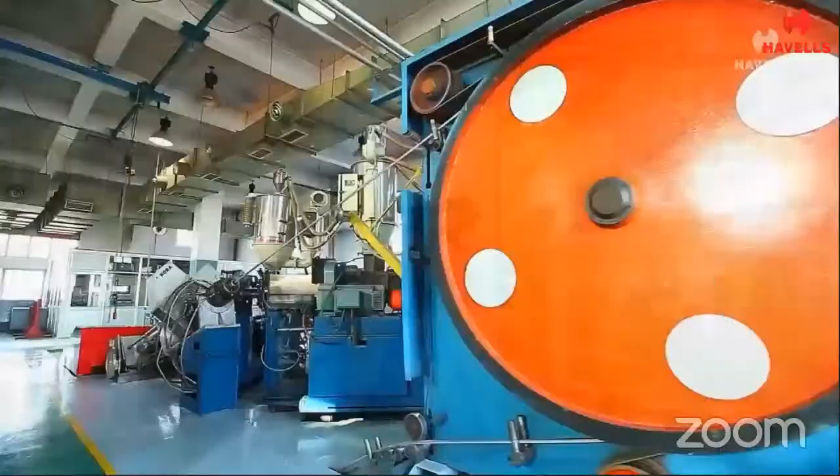For more than 6 decades, Havells India Limited has been focusing on building a better future, a future where technology is used to drive progress, improve business outcomes, and create a better quality of life. Today, Havells stands tall in the FMEG sector as a major power distribution equipment manufacturer with a strong global footprint, owing to its innovative future-ready products for a wide spectrum of applications. With the acquisition of Lloyd in 2017, Havells made a foray into the high-potential consumer durable segment with offerings of air conditioners, LED televisions, washing machines, refrigerators, and dishwashers. This new synergy further complements the brand's deeper into homes vision. Havells owns some of the most prestigious global brands like Crabtree, Lloyd, Standard, and Reo. Its global network constitutes over 5,000 professionals across its offices. As part of its Make in India philosophy, Havells manufactures 97% of its products in-house.

With 14 state-of-the-art, fully automated manufacturing plants located across India, Havells offers superior quality and globally benchmarked products to its customers. Havells has set up a large distribution network to set new benchmarks in prompt delivery and service. Over 11,000 dealers, 150,000 retailers, and 700 plus Havells Galaxy exclusive brand showrooms across the country help customers choose from its wide range of products.

Havells has a robust supply chain management system with 31 warehouses located pan-India. The meticulous forecasting and demand planning delivers a seamless tracking system.

Havells is the first FMEG company to offer doorstep service, offering a seamless post-purchase experience. It has the largest service network with 800 plus service points covering 441 towns, 24/7, across India.

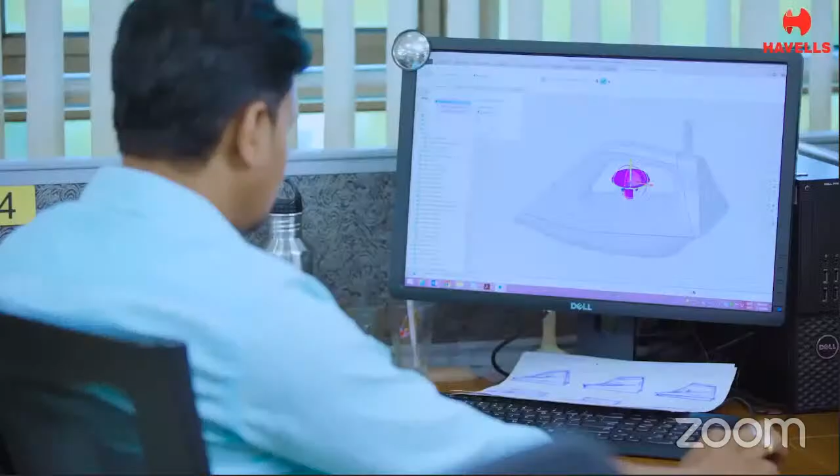Havells Center for Research and Innovation, CRI, at Noida, with a team of highly qualified engineers and designers, continuously works towards creating differentiated and innovative products while adhering to stringent quality norms at par with international standards. Havells products are certified by nationally accredited laboratories such as CPRI and ERDA.

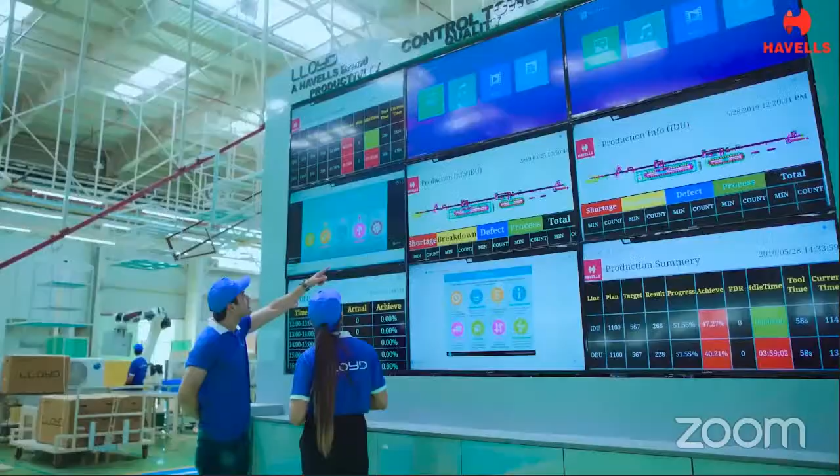Havells has a strong in-house IT vertical which develops innovative technology platforms to support its robust service and supply chain management system. Growing together is ingrained in the ethos of Havells, resulting in many innovative and profitable schemes for its dealer community.

Havells has strong credentials in B2B and large government projects as well, such as lighting up Kolkata railway station and partnering with NBCC India Limited to beautify and transform the night view of India's heritage monuments like Humayun's Tomb, as it believes in the philosophy of spearheading the progress of the nation without ignoring the past.

Havells has taken giant strides to create an innovative world full of possibilities, not only for itself, but also for all its channel partners and customers. With a commitment to improve people's lives and help create a better global society, Havells is inspiring the world and making a difference.

Okay, so let me talk a bit more about ADEX and the overarching program, which is called Havells Insignia. We are bringing industry experts onto this unique platform that we are creating, called Havells Insignia. The objective is to engage and collaborate with each other.

It is going to be an interactive platform where architects, designers, and consultants of repute from India and abroad will come together to share their thoughts, vision, expertise, and shared knowledge. Most of it will be through a select invitation for a select club. It's going to be a unique initiative dedicated to facilitating the development of an ecosystem for world-class designers.

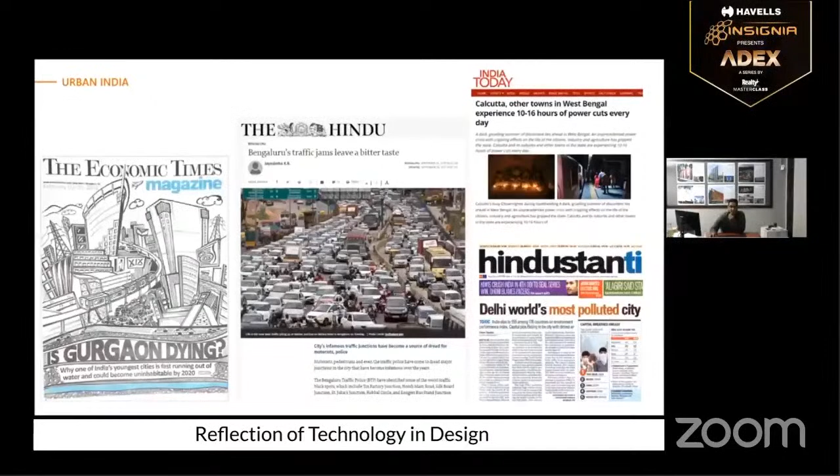India has one of the largest populations in the world, next to China—about 1.4 billion people. But urban India has all the sort of issues that large emerging nations have. It has water issues in our cities. Climate change has affected India tremendously; we've had some of the worst weather patterns in the last year or so. We've had issues with energy, and issues with pollution. Some of this led to a lot of our early thinking on why we would pursue the whole genre of sustainable design, and see if architecture, if buildings, the whole built environment, can help resolve what our politicians and our cities over the years have not been able to do.

So very early on, we looked at what's really the issue with energy. We did this study about a couple of decades back; at that time India's population was 1.2 billion, now it's about 1.4 billion. Broadly speaking, India has a daily solar radiation on average of 5.5 kilowatt hours per square meter of the country's land mass. We only really need 0.003% of this land mass if we were to drive our entire energy needs by solar. It's actually nothing—only 2% of the wasteland, the deserts of India, is all that we would need to drive all the energy, not for today's requirement, but for what is projected for 2050.

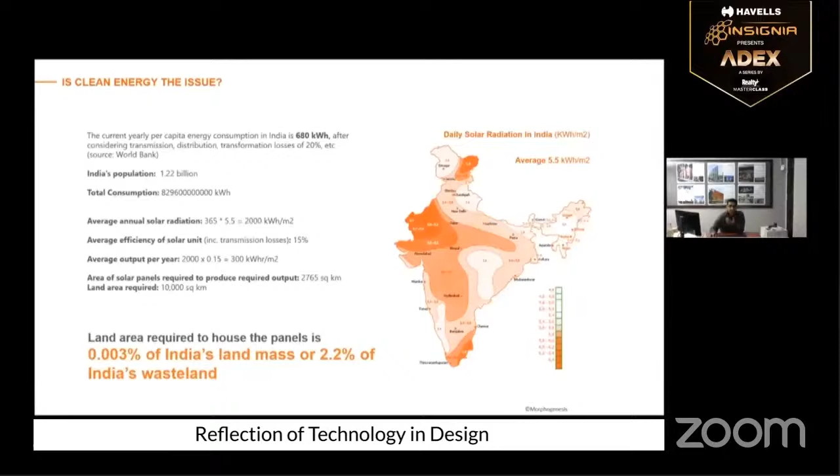Then the second part was water. If we just look at the annual rainfall—I know this is very macro level data, but it laid the context for what we would do at a micro level—energy wasn't a problem, but it is. Water isn't a problem either: 2% of the rainfall in India, if harvested, would suffice 150 liters a person for 1.4 billion people. So what are we really doing? We were looking at our cities and our buildings, and we had developed this sort of system where our buildings would consume energy, consume water, and generate waste—it was a one-way flow.

Uniqueness is about a set of metrics which looks at tradition, heritage, and culture. That third philosophy grows from the fact that across India, given that price points of construction are extremely frugal, everything started looking the same. It didn't matter whether you were in a cold climate, a temperate climate, a hot climate, or a warm humid climate, most buildings started looking the same, because they were adopting processes of construction and design that allowed for that to happen. We found ways of digging into the past to find ways to build the future. That's where we got the unique.

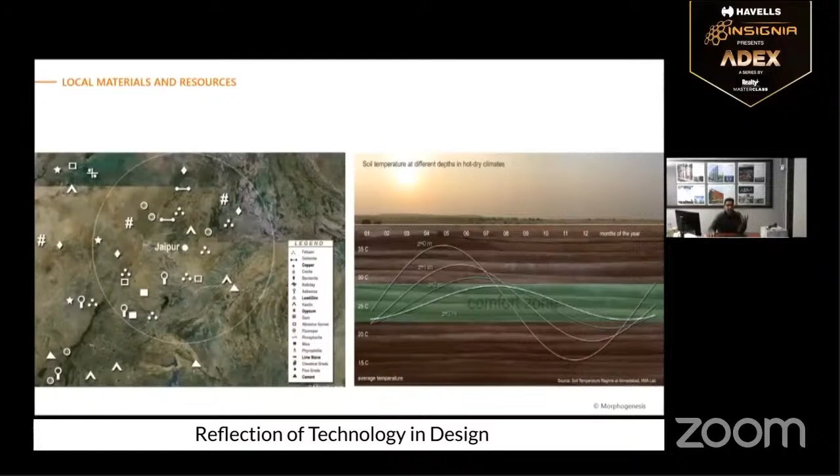Typically, any institutional building in India would be built as a block, with open space around it as recreation space. But in a desert climate, that open space is worth nothing, and these large outdoor spaces become mostly unusable through the year. So we said we won't build vertically, we'll spread the building out and use the whole building as shade, like a tree, so the space under the building becomes viable. We did a very optimized, simple rectangular form, the idea being to decrease the amount of surface area exposed to heat gain.

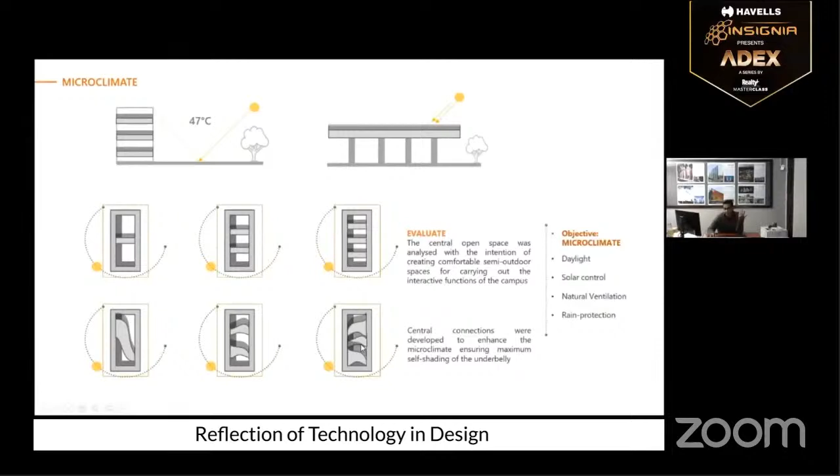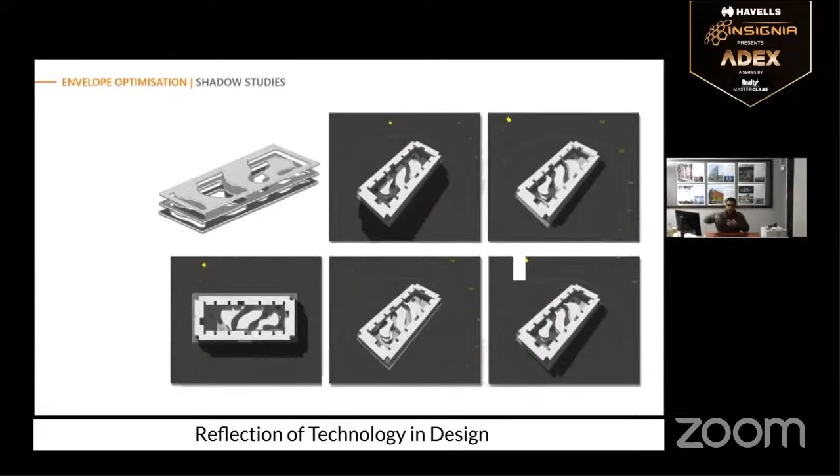We went through a series of courtyard morphologies. The idea was to keep the sun out but let the daylight in. Because it was a design and fashion school, the emotional element was that the courtyard shouldn't be a rigid rectangle, but should flow freely like a Mobius strip. That was the model when we began, about a decade back.

To achieve the parameters of no air conditioning in a desert climate, we sunk down 3 meters. We recycle all the rainwater and water from the toilets through filtering and a treatment plant. We created our own step well, a baoli, which allowed for evaporation through the courtyards, cooling the building internally. That negative space was pulled out of the program.

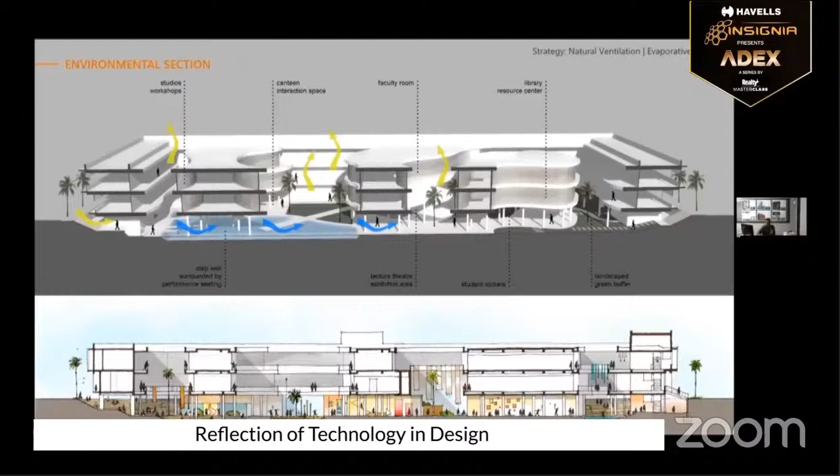We were supposed to build about 25,000 square meters; we built about two-thirds of that. The entire area underneath, which operates at about 28 to 29 degrees Celsius naturally, is used for an outdoor cafeteria and various functions and performances. That whole underbelly section was designed to do that.

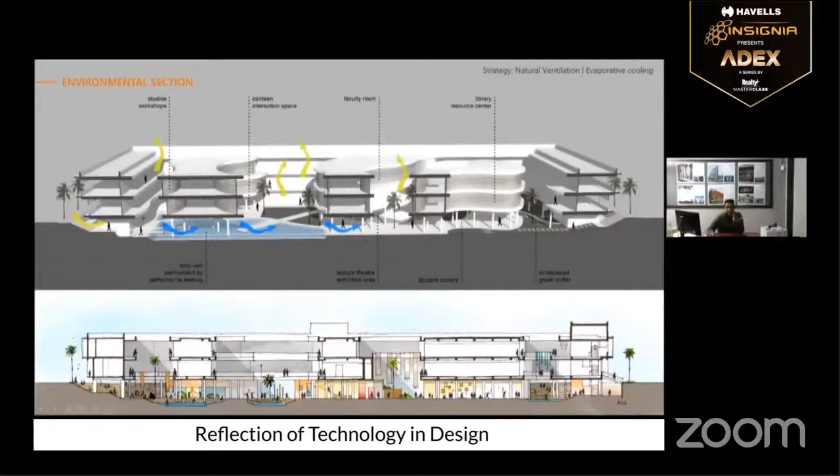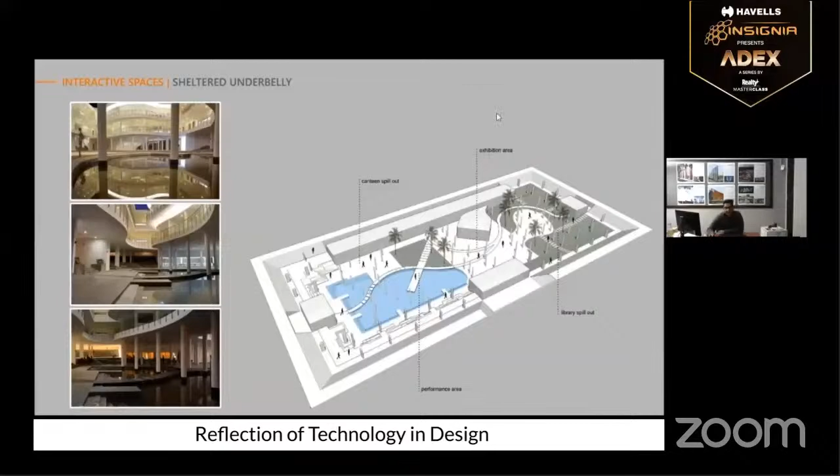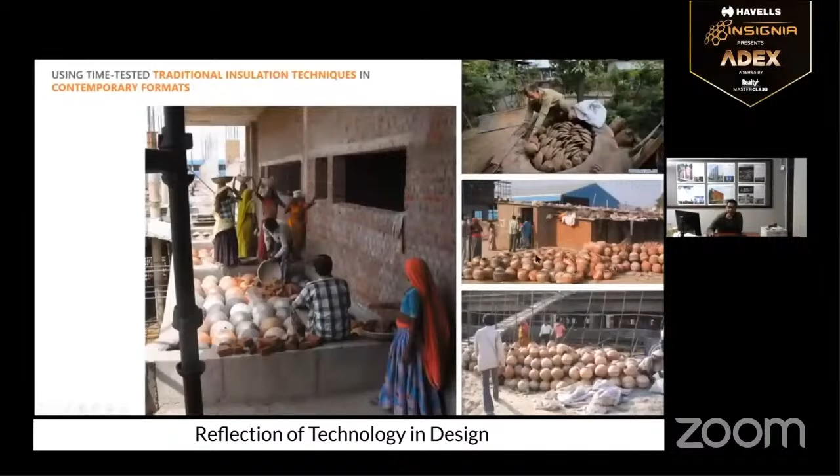We looked at insulation, which was very critical for a project like this in a desert climate. There was a local community that made pots, and we couldn't afford expensive 50 mil glass wool or rock wool insulation. We thought pots, used traditionally, would make for great insulation since air is a great insulator. We used inverted pots with a layer of screed on top for insulation, made on site by this local potter community.

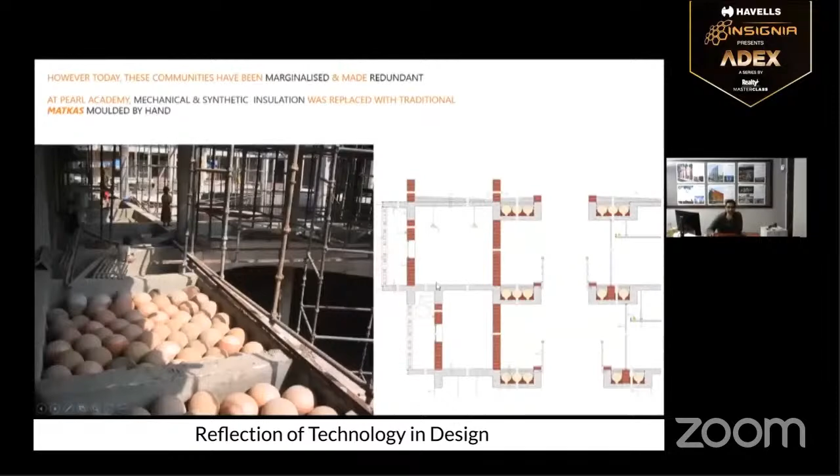For the external skin, we kept our window-to-wall ratios very optimized, at about 20 or 25%, providing adequate daylight.

We created a buffer space, essentially a service space and a screen. The screen is made by a local community who make cement concrete jalis on a very simple system. We ran all our services on the outside, so the screen allowed the windows to go blinds-free, and the design of the screen changes based on orientation. All the services are openly accessible.

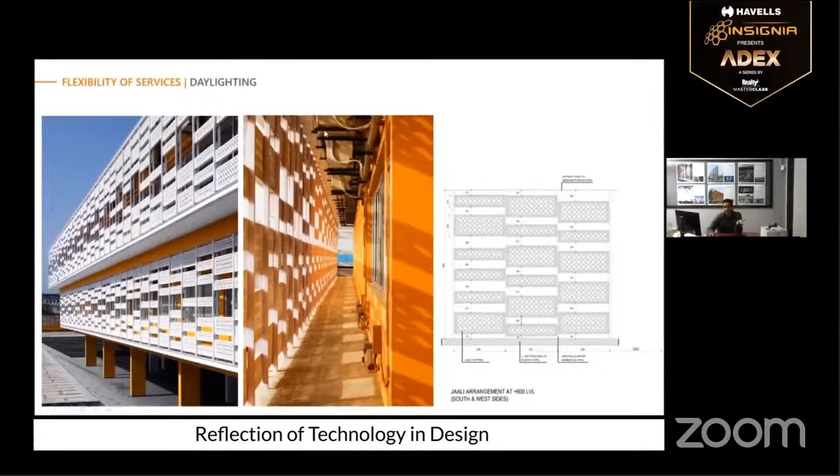The sprinklers run here, and we use them as a facade cleaning system, because once a month they're tested and flushed, which cleans the facade. That's the building when it was finished about a decade back.

All the materials, the stone, everything here was sourced from within a 200-kilometer radius. We did achieve the price point.

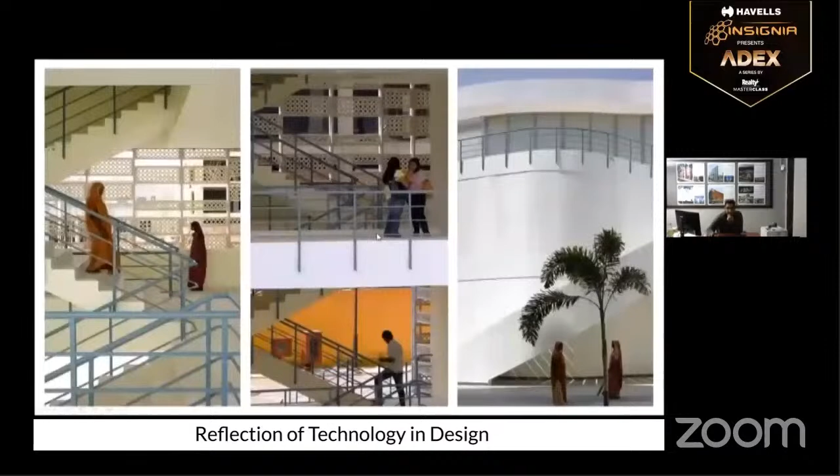This building went on to become very popular with various schools of architecture. They've studied it, and we've had students from masters programs in sustainable design recording temperatures. For the last decade or so, consistently in summers, when external temperatures hit 47 degrees, it's hit 29 degrees inside without air conditioning. It runs on an energy performance index of about 25 to date.

Very simply, we get the bill just divided out. Whilst it was being built, it gave a certain level of employment to the local community, and that gave us a lot of inspiration.

We thought that if it was possible to get an 18 degree delta by passive design, and to create something at these price points pushed by the adversity of price, then what is it that we could do as we moved on? That's when we started putting more formal metrics.

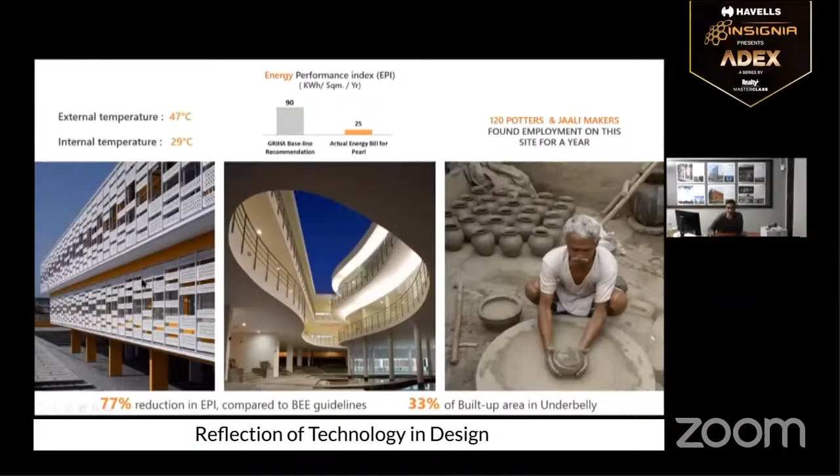I'll jump to a very different kind of building, the British School, which is in Delhi, a composite climate. Here budget was not an issue, and our brief, to begin with, because it was the British School, was that they wanted it to be centrally air conditioned.

All British schools pretty much across the world are either centrally heated or centrally air conditioned. We argued that if we can begin to achieve as much as we can naturally, then we will do so. This project started about 6 or 7 years ago.

We then spoke to the clients, which was essentially the High Commissioner and the board. We said, why don't we look at this 5-acre site and try to do India's first net zero energy, net zero water, net zero landfill waste-to-landfill kind of building. And they said, fine, let's give it a shot.

So we did the math on the water, and from the 5 acres of land that we had, without going through the calculations, we could support a population of about 1,300 students. We said we'll do this in reverse. The notion of carrying capacity comes from the fact that what the land can afford in terms of water and energy is all that we will build. And 1,300 students worked very well for them.

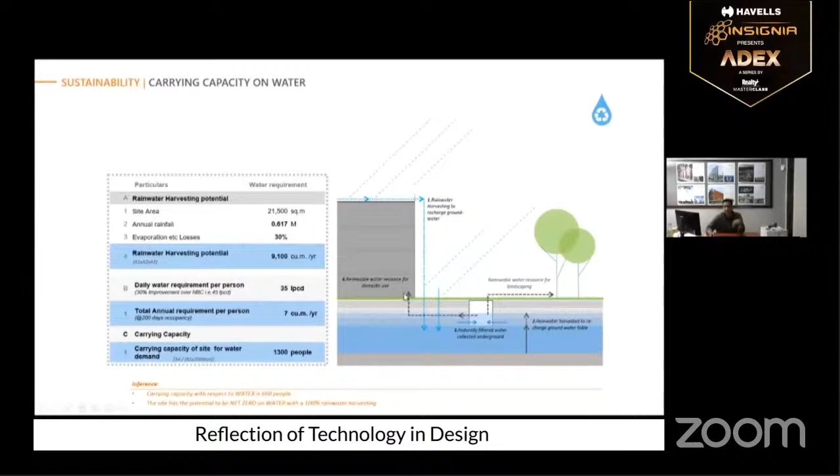Now the problem with a city like Delhi is all our rain is concentrated in 3 months, so you can't store that much water for the rest of the year. So what you do is dig down and find an aquifer that's pure, and use that as an underground tank, an exchange — you put water back into it and pull it out of it. Over the year, you go net zero on water for 1,300 people.

We took the same 1,300 people and went about building out how much, because we needed about 20,000 square meters for fitting out an IB school. We were trying to work out the correct ratio of rooftop solar to number of levels needed to get to net zero, and therefore what the target EPI should be. After a lot of back and forth, we came to a 4-story building with a target energy performance index of 56 kilowatt hours per square meter a year.

That number would by necessity drive a lot of passive design, where a lot of the heat loads and lighting loads would need to disappear. That's when we would be able to be net zero on water and net zero on energy.

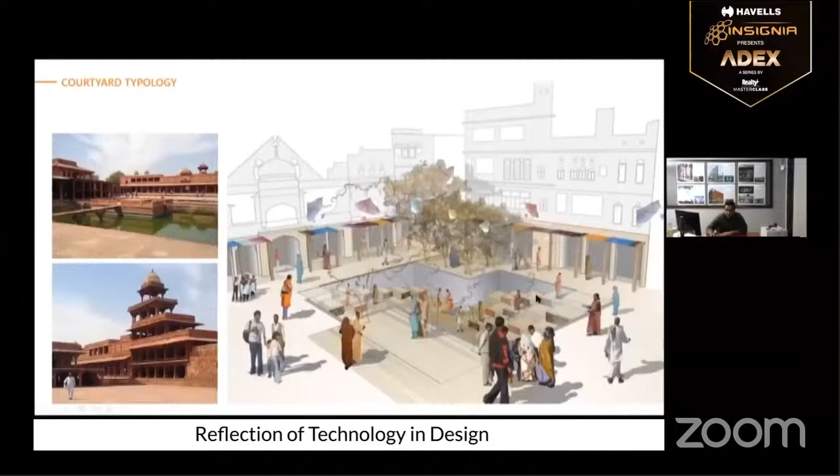Again, we looked at, in Delhi, there's a very old city called Shahjahanabad. We looked at how those morphologies worked, how some of the earth banking worked. The other key area was safety and security.

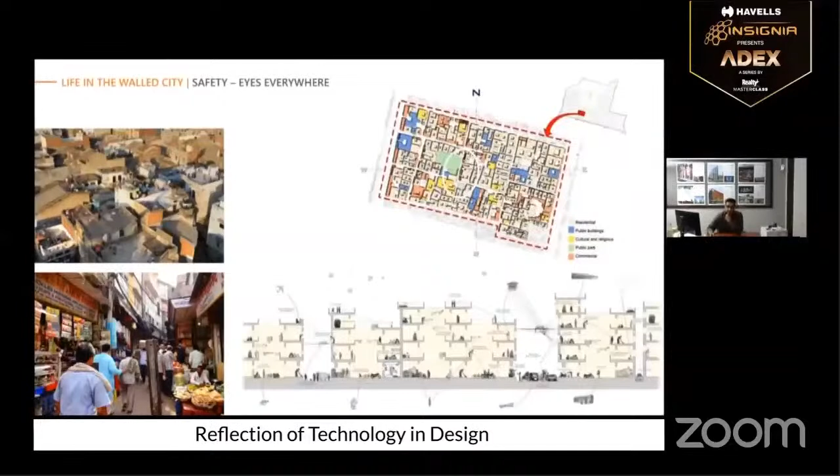Because we were propagating the idea of having open corridors, not doubly loaded and not air conditioned, the issue of security and CCTV cameras came up, and we studied this idea of eyes everywhere. If you look at any old vernacular evolution of any city anywhere in the world, from when there was no police or CCTV cameras several hundred years back, the cities were designed so that there were eyes everywhere, and that really was the security.

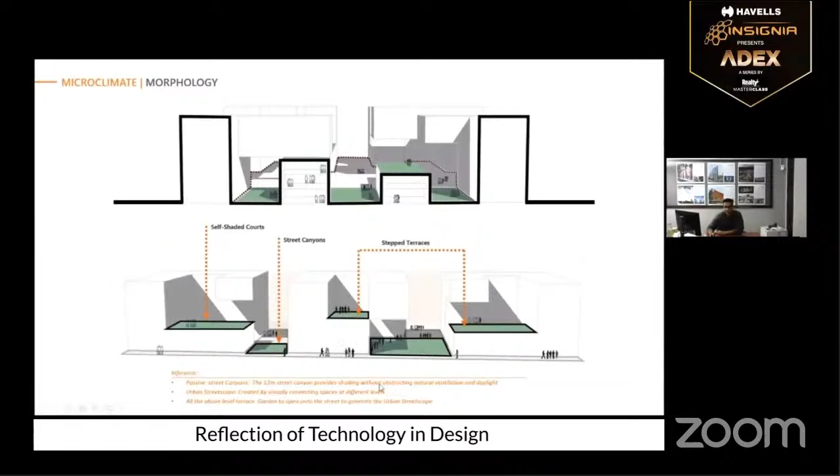So combining these two factors, we began to look at morphologies that would give us eyes everywhere, step terraces, shaded courts, and we landed on this model with a rooftop area sufficient to make this a net zero energy project.

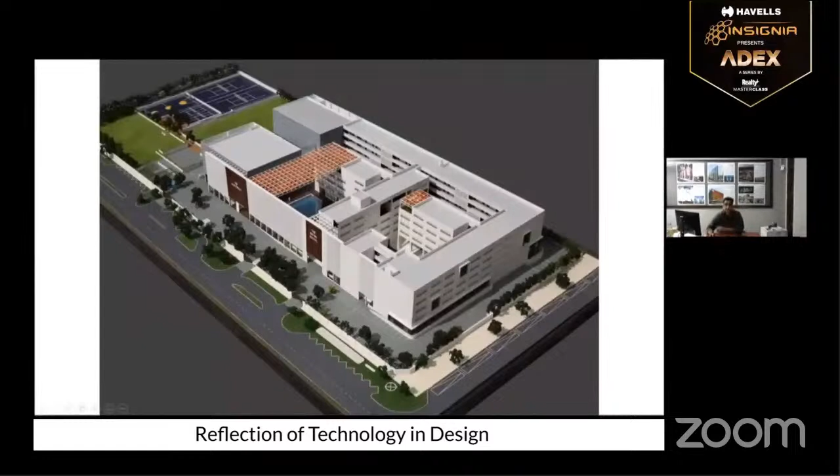Some other small things we did: we put the labs on the top because they're constantly mechanically ventilated due to fumes, which automatically creates a buffer for everything underneath. We created natural voids for wind flows to allow the courtyards to function properly. And because of the site's orientation, we pushed that form again like we'd done earlier.

We began to look at the Jaali formation. Most of our teaching areas were on the northeast and northwest, while the southwest was essentially a large screen just shading out the courtyards.

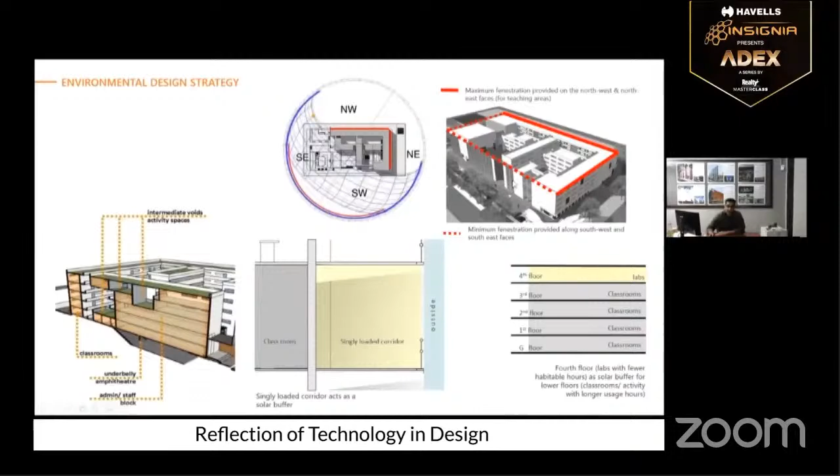A lot of this was built on site, so we came up with this construction methodology of full windows and having a secondary screen. The screen varies its opacity and density based on what's behind it and what orientation it works to.

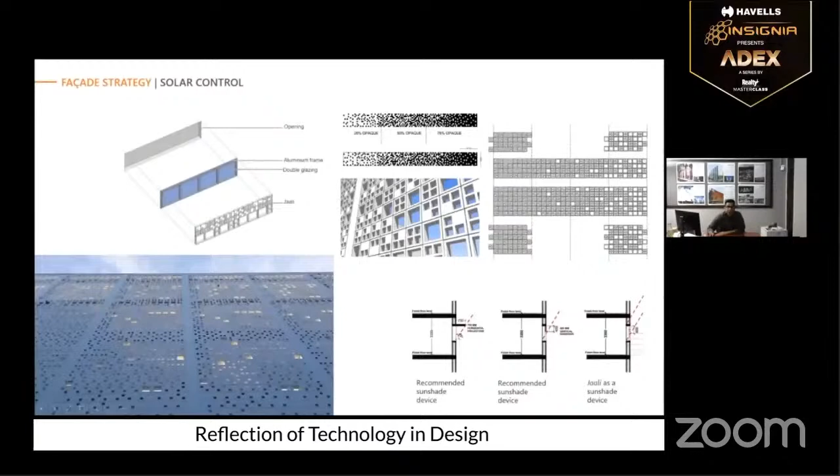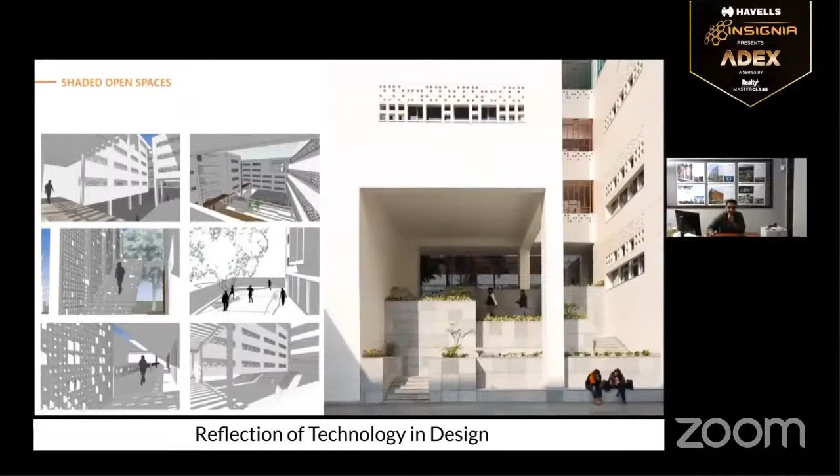That's now the completed building. We did a lot of modeling for it. So we had the classroom, and that was built perfectly, but to us what was more important was to create enough open spaces that would be comfortable through the year. We were targeting a delta of about 8 to 10 degrees in perceptible temperature in the outdoor areas of the school compared to the external temperature.

And then here's that project. That's the front screen that shades off the southwest and creates a full microclimate behind.

Again, open corridors. What you see here are air filters because it was a British school. We didn't air condition the entire school, but we did for the classrooms, and then created these sort of passive spaces, a lot of outdoor spaces. Now, this is a bit old, but the trees are grown now. Yeah, and that's the school.

Now, on our post-occupancy, we to date have an EPI of 52. It's the only school in India right now which got a GRIHA 5-star rating. GRIHA is India's own green rating system. As I am a founding member of the green rating system, I can say that it is genuine, I didn't falsify any data. But it's operating at a 52.

Now, what you see here is a combination of surface temperature and air temperature, which we map back to perceptible temperature. So at 44 outside, we managed to get a 10 to 12 degree delta in all the open spaces inside that school. To date, we keep our classrooms at about 26 to 28 degrees. So there's a gradation as one steps out and moves through this entire project, and it operates today as a net zero on all accounts.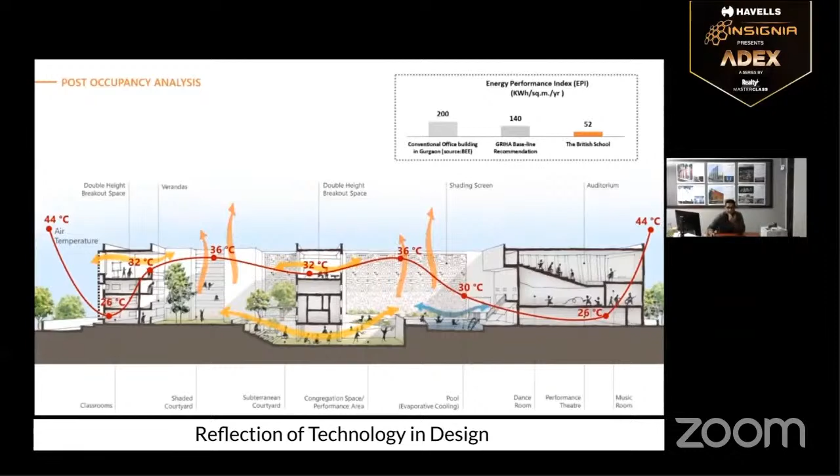So that was in that composite climate. In a composite climate, the winters aren't a problem. The real problems are, and it's not even the summer, because shade, thermal mass, screens, a bit of evaporative cooling, that works. The real problem has always been the monsoon. Why it works really well in schools is that Indian schools are shut in the monsoon, that's the holiday period, and that works really well, which doesn't in other typologies like offices or residential. Which brings me to this third one.

This is a campus, a 100-acre campus for a very large technology and IT firm called Wipro. They're amongst the 3 largest listed companies in India, and they do these really massive campuses with tens of thousands of people working there. This is located in Hyderabad, in Telangana. It's a very strange climate - not very adverse, but it's got a tremendous amount of diffuse radiation. It barely has cloud cover through the year, and temperatures do go up but not that high. It has reasonable wind speeds and temperatures, but the glare is incredibly high.

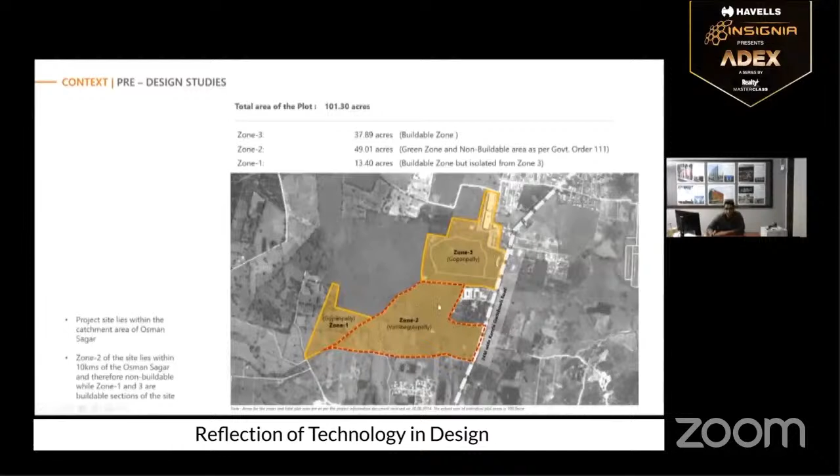The diffuse radiation is what pushes temperatures up. We worked on this project with TransSolar, one of several we've done with them. This is where we began. We looked at the site, about 100 acres, divided into 3 zones. Zone 2, as we discovered, was largely unbuildable because it sat in a radius from a lake that wasn't too far away, and it's a bit low-lying. The really buildable areas were these 2.

We again pursued the idea of a carrying capacity. We had the 100 acres and worked out backwards how many people we could support from the rainfall. To store that water - because Hyderabad's entire geology is slate rock, so it was very hard to get to an aquifer for water exchange - we really had to build a reservoir. At a 4-meter depth, we needed about 15 acres of water reservoir to support 15,000 people working there.

Again, similarly with energy, we worked out that if we hit a 60 EPI, then with 15 acres of a solar farm planned over and above the water reservoir, we would be net zero on both accounts. So essentially the solar farm shades the water from evaporation and picks up the energy. And that's what we really did - we identified the low-lying area where everything slopes, and we got the natural rainwater.

It's a 15-acre lake, about 4 meters deep, and then it's got solar panels that sit on top of it and on the site, shading it. That piece of land will never get overshadowed, so we could do the solar farm, 15 acres, on the site itself.

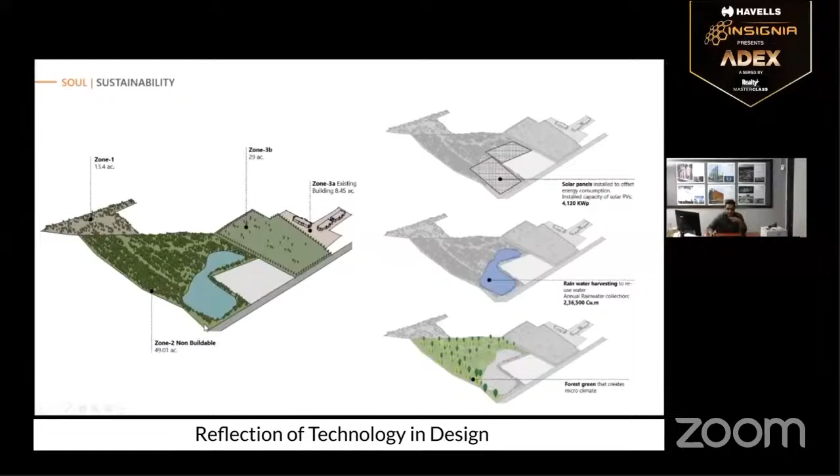That set up the basis of the first series of master plans. The second exercise was how do we begin to hit 60 kilowatt hours per square meter per year, of which 25 is primary energy - lighting and air conditioning or ventilation - and 35 is equipment. How do we begin to get our building to work with the 25? The 35 was a given, that's all internal equipment.

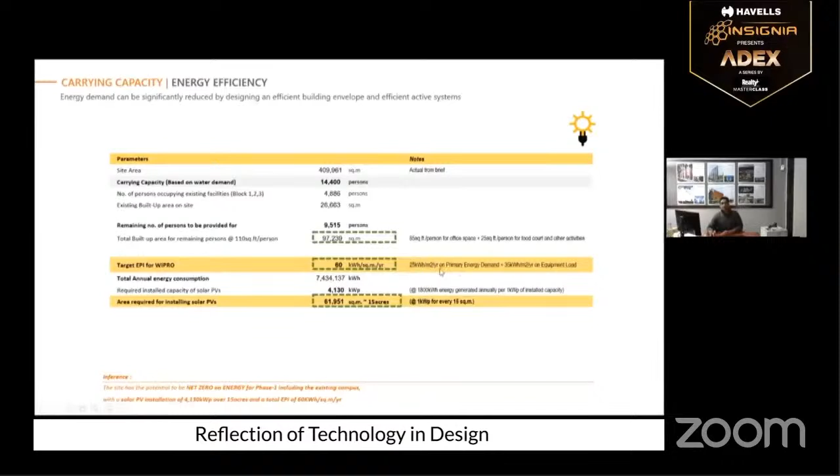The question really was how do we work toward 100% daylighting on the floor plate, and how do we bring our air conditioning requirements down to a point that works through the year - remembering these buildings tend to operate about 10 to 12 hours a day, 365 days a year, because they're essentially very large tech companies.

So we began this exercise where we did about 8 of them. We did many more, but we isolated 7 morphologies built upon isolated single towers, a series of square towers, courtyards, a hybrid of tower and courtyard, mid-rise high density, low-rise high density, micro courtyards - we came up with several morphologies heuristically, and then began to test them.

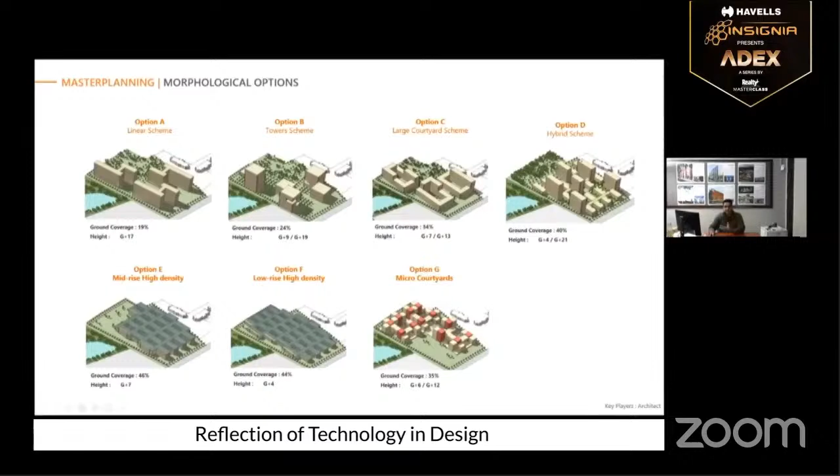So various kinds of ground coverages, various heights, and we put them through a series of analysis. The first analysis we did was, of course, for wind, because wind was critical for us - if we were to hit that 60 EPI, which is 25, we also needed to get a lot of the functions from inside the building out.

A lot of the functions needed to run passively without air conditioning. Of course, where the essential work was happening would be air conditioned for various reasons - their data centers need very tight control on air conditioning, etc. But how much of this could be passive, and for that we needed the wind. Predominantly Hyderabad had an east-west wind, and we put all these various forms through analysis.

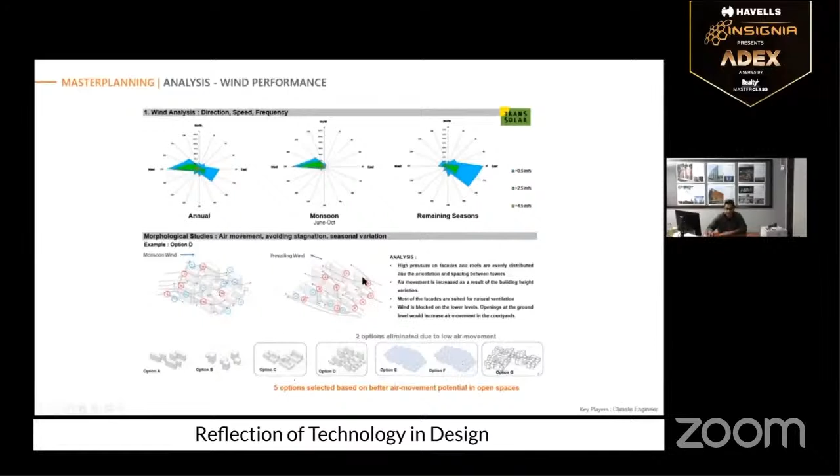We selected 5 that performed reasonably well, then put them through the horizontal plane. We were trying to look at, in terms of seasonal solar radiation, what the insolation would be on the lower planes, and based on that we picked up a certain scheme.

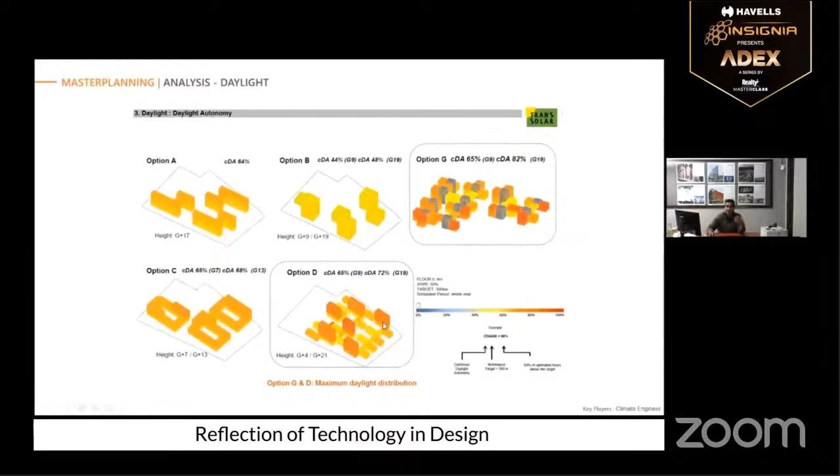We then looked at daylight autonomy for each of these 8 or 9 different schemes, and again began to identify - this was a highly iterative exercise between wind, solar radiation in the open spaces, and daylighting within the internal spaces, to determine what morphology would suit it best. Finally, we selected the option which was the micro courtyard option.

After doing a series of CFD runs on it, we cleaned up the entire model - again, highly iterative. If anyone is very good with algorithms, this is a great process for that kind of work. And then we finally ended up with our result.

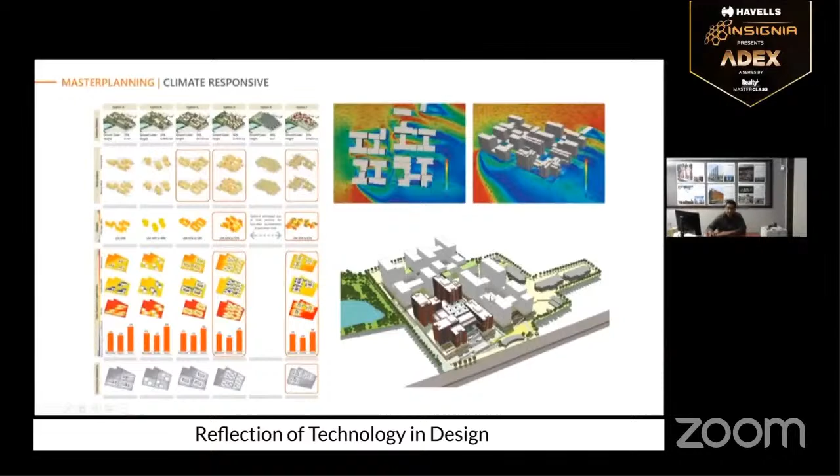So the first phase is what is now under construction, which I'll take you through. We've already done the urban design for the remaining 3 phases, so that in a sense the wind flows, the evaporative cooling, the shading - all those parameters remain the same.

Coming to that first phase, which is approximately about 1 million square feet, about 100,000 square meters, we began looking at the outdoor spaces, and went through a series of analysis looking at a combination of having no roof, no fans, no dry misting, and having only a roof - like a lightweight tensile roof - a combination of roofs and fans, plus dry misting. We then did a cross analysis of the financial savings versus these spaces sitting inside air-conditioned spaces.

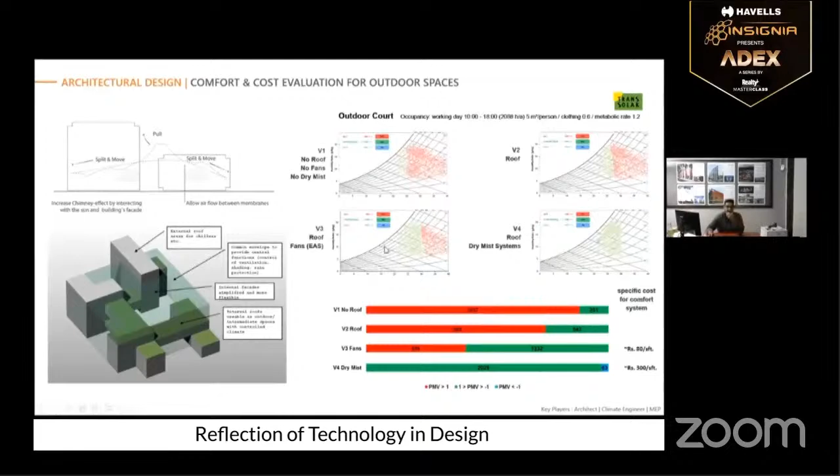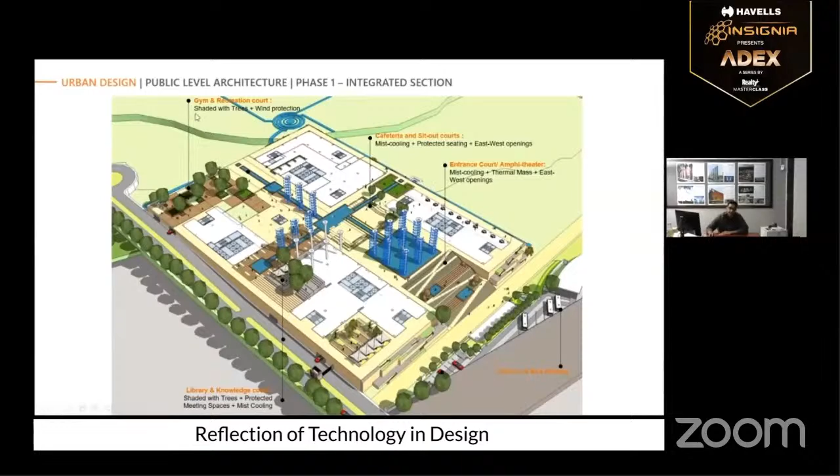That led to this design, which I call a large desert cooler - very traditional. A desert cooler is essentially what used to be there before air conditioners: a box with a fan, with hay on the side where water ran down, cooled it, and pushed it through. So the entire plan, which sits on an elevated podium, was designed for those wind flows and those outdoor spaces.

We worked with SBP and got this height with this tensile roof, in combination with Transsolar and us, and got this entire outdoor space working in a way that it is comfortable through the year - comfortable for rain, comfortable for the summer, comfortable for the winter. By and large, this entire outdoor space now takes on primary functions.

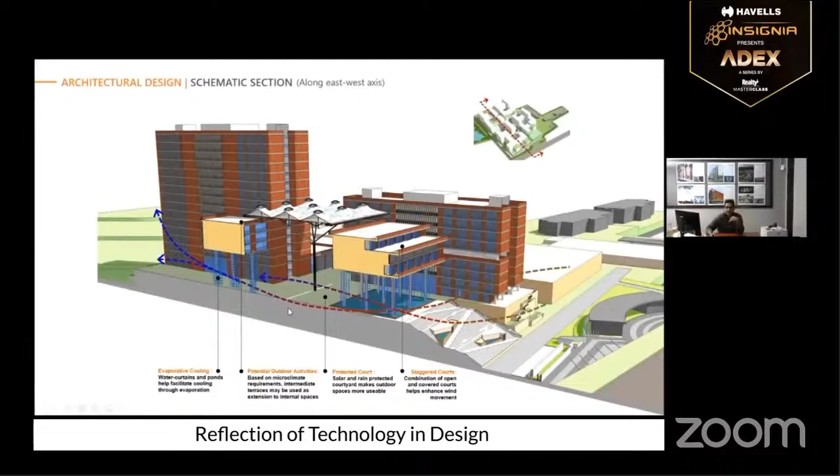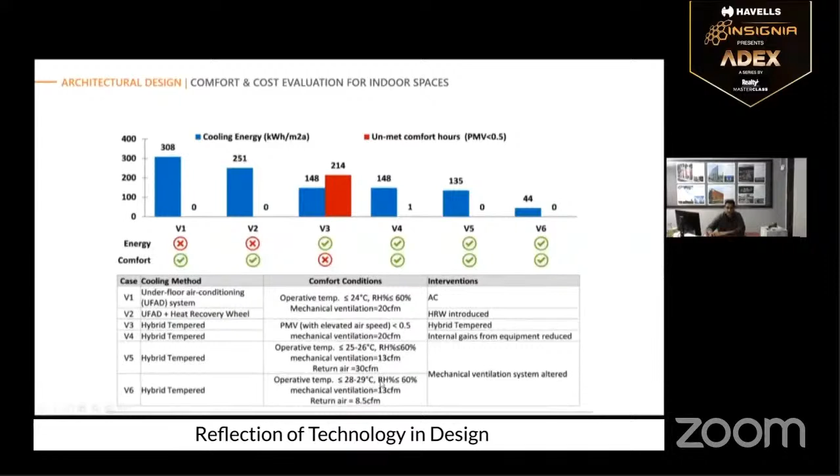I won't spend too much time on the indoor spaces. We went through a similar exercise of looking at various mechanisms of how we can remove as much air conditioning from the inside—whether it's underfloor, with heat recovery, hybrids, low velocity fans—and came to an optimal solution. A lot of this is cost-based, but it's also a combination of sustainability and cost. And of course, settling for the fact that the client agreed to an internal temperature of 28 degrees, which is useful because external temperatures can go up to 38 to 40 degrees, and working out the whole system based around that.

So when we finished the design, 56% of the area was under air-conditioned space, but consuming less than half the air conditioning. Typically in this region, a building would consume 250 square feet for 1 ton of air conditioning. This project is operating at about 650 square feet per 1 ton of air conditioning. So even though 56% of the spaces are air conditioned, they're consuming less than half.

About 35% have been moved to natural ventilation. Now when I say natural ventilation, and the third piece which is shaded outdoor, all of these are achieving thermal comfort conditions through the year—greater than 90% of thermal conditions through the year. So not only did we manage to get about 10% of that area outside, which is nearly 10,000 square meters—cafeteria, gym, recreation, library is in that outdoor shaded space that I was showing you.

We have outdoor meeting rooms, which were removed from the inside area, and of course the arrival plaza. And in the naturally vented spaces, we have various other functions. So effectively, only half the building is air conditioned. This typically would be at 100%.

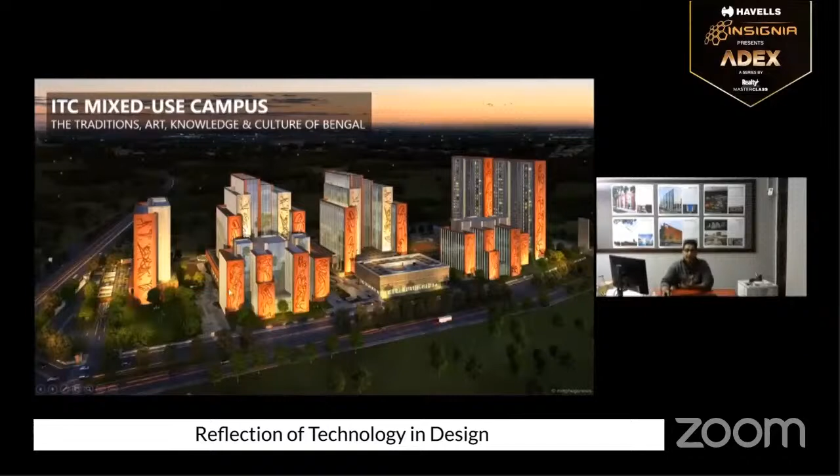Okay, so a dramatically different project. This sits in Kolkata, which is the extreme east of India. It's got a warm, humid climate, extremely humid, and temperatures don't change very much through the year. It's very close to the sea, but it's also in some senses the cradle of civilization. A lot of the first universities, the first art, knowledge, culture, music—a lot of that was born in this part of the world, in this city particularly—and we began looking at the site.

Now I think the total area here is about 3 million square feet, if I'm not wrong—yeah, about 300,000 square meters, and it's a 17-acre site. Now we did the math on this. We couldn't push this one to net zero because, like I mentioned earlier, any environment that is highly humid—the city maintains greater than 70% humidity pretty much through the year—and therefore in a mixed-use environment consisting of offices, hotel, conferencing, data centers, etc., the air conditioning was inevitable.

However, what we started thinking about was what could we do in terms of the entire site, and therefore we set up a site plan where we could maximize the wind flows through the site. And all the buildings—what we did here was, because Calcutta sits on 22 degrees latitude, which is pretty much the tropics, we tilted the buildings 22 degrees to pure north. What that allowed us to do was essentially shade from one side, because when the sun overshoots, you end up shading from two sides, and it led to a 25% reduction in solar exposure.

We found this very interesting. But every time you tilt a building towards the east from pure north, by the latitude the building sits at, it actually helps cut down solar exposure naturally, which helped reduce the amount of shading we had to put into the building in the first place.

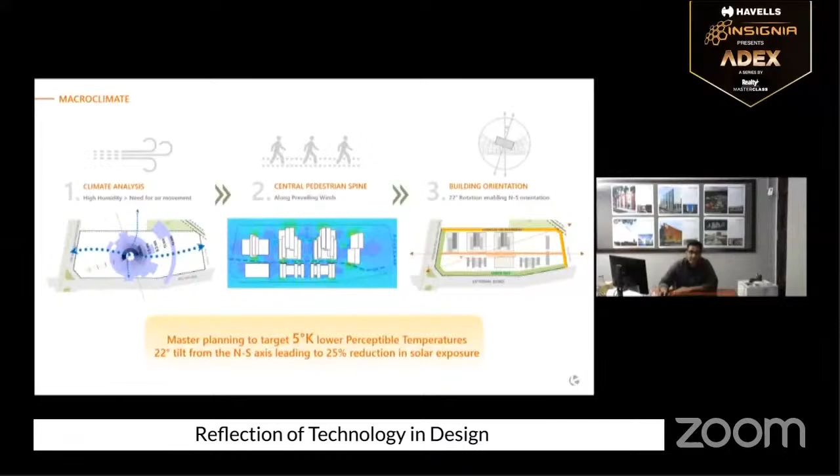Then once we had that east-west axis, we left a lot of cross axes as well, because we wanted a lot of natural ventilation. Wind speeds are not very high in Calcutta—they're at about 2.5 meters per second—but over the year, they change direction. Which is why we had to have this sort of very free layout, as opposed to the previous one that I showed you, which was very fort-like, but very channeled.

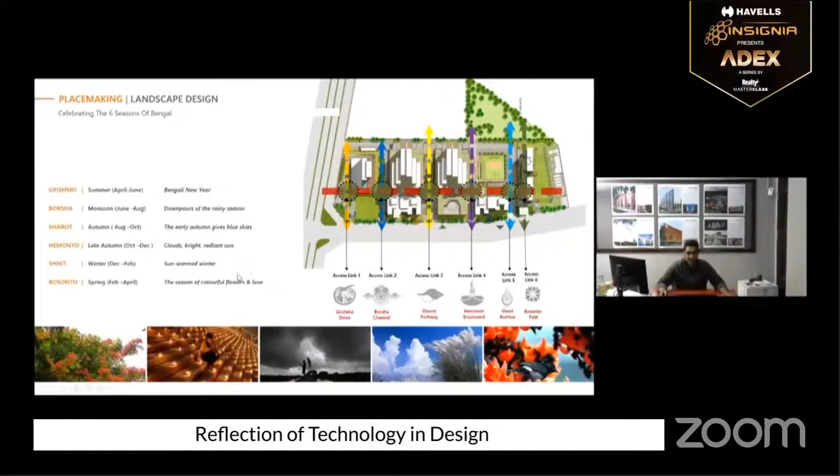This had to be sort of very open and transparent. I'm going to go to the landscape design of how that works with the wind flows.

The second problem we had was that a lot of this involved very large floor plates, 40, 50,000 square feet. Traditionally, large floor plates end up very deep, 60 by 60 or 50 by 75 meters, and daylighting drops to anywhere between 40 to 50% on a daylight autonomy measure. We took the same area and changed the morphology of the building so we could push that back to about 90 to 100%.

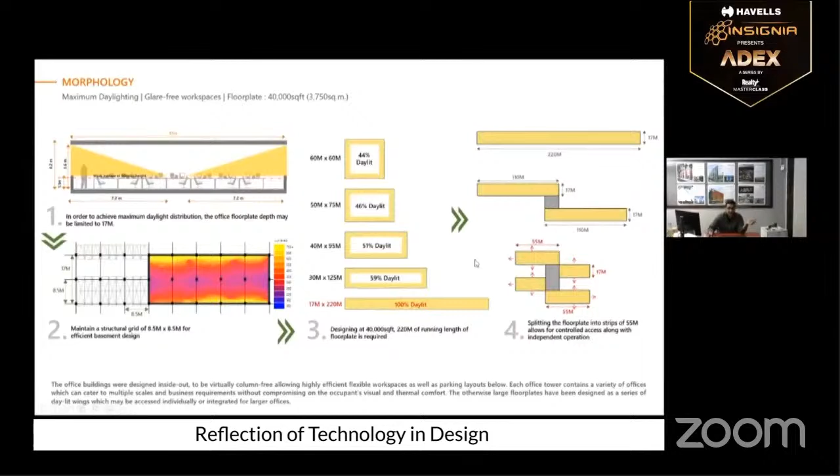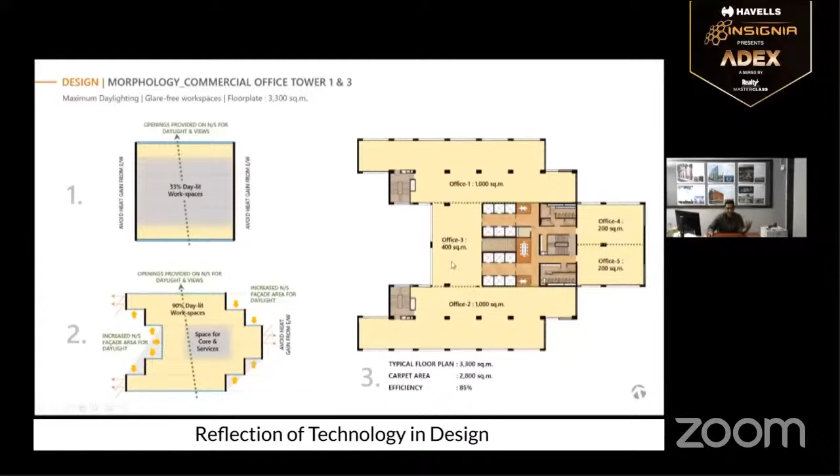The point is that you don't have to work with the form as a given. If you go iterative, the same exercise allowed us to break this up, placing the core and breaking the form so we get 100% natural daylighting. That was the final piece of design when we finished up about 2.5 to 3 years back. It's been in construction ever since.

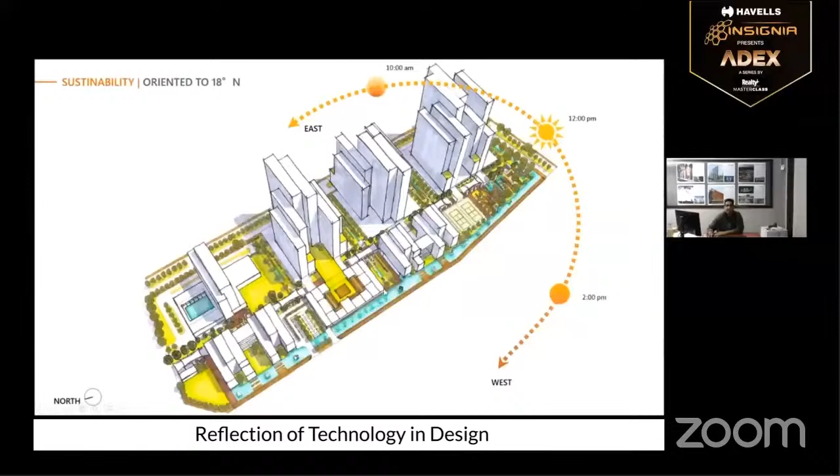We then began to look at the fact that we had a microclimate on the site—reasonably well shaded, well ventilated. We started working with a lot of local craftsmen, which goes to my earlier point about how we work with local communities. We found a lot of this tradition, art, and knowledge, and brought that back.

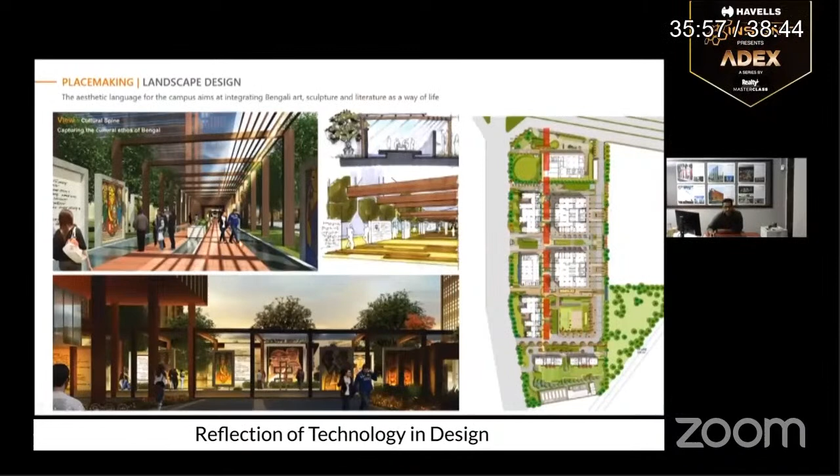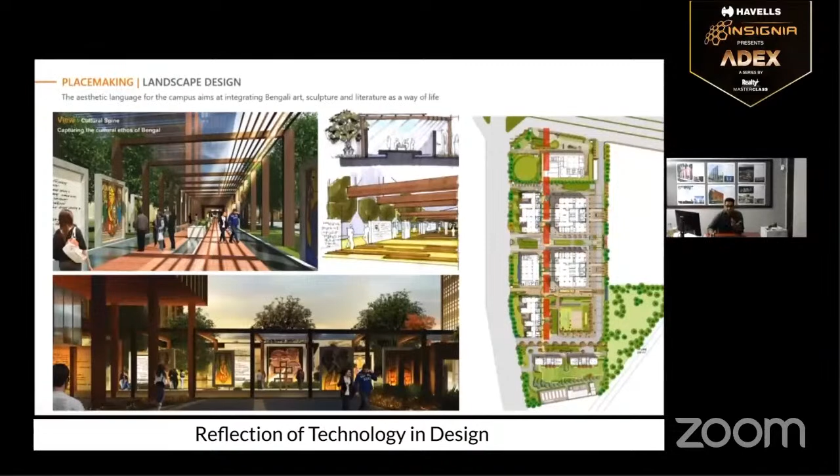A culture and art gallery, naturally ventilated, naturally weather protected, 17 acres of outdoor arts and crafts museum. We worked with a lot of the local art schools and local craftsmen who had this incredible craft of making sculptures. We then used a lot of the traditions of Bengal, of Calcutta, and abstracted them into graphic artwork which the artisans could work with.

We started using the west and east facades, since all our buildings were north-south, albeit turned 18 degrees, creating this urban art form that provided great amounts of insulation because they were carving local stone. Working with the local alphabet and the stone, we came up with a 500 meter by about 100 meter long urban art facade.

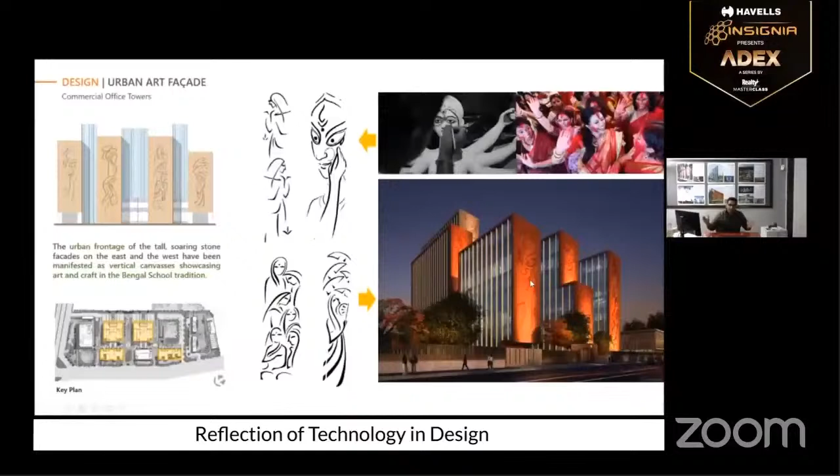This is all on the west side, a lot of it crafted by local craftsmen, and again on the other side, on the east as well. So that's the project, again under construction, with a lot of this being done on site.

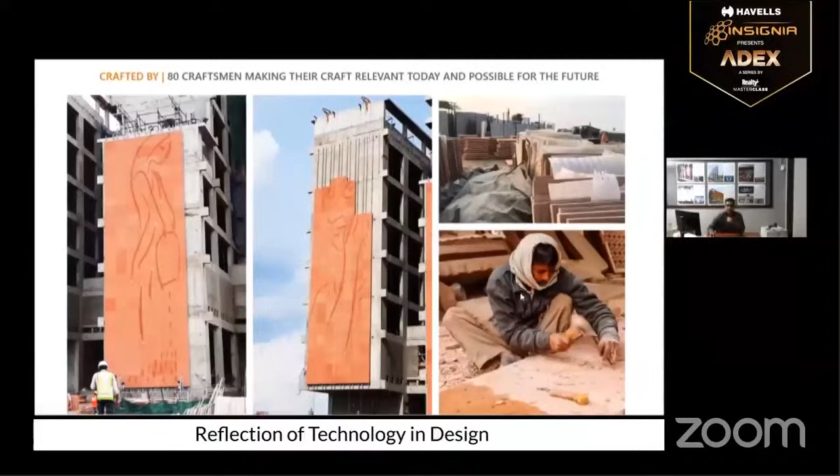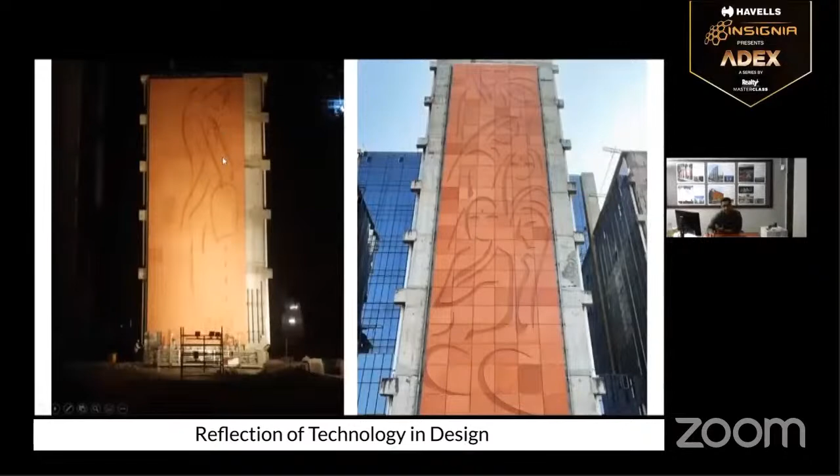So we managed to get, in a very humid environment, an EPI of 43 by a lot of these measures.

We are 90% daylit, zero glare, which is critical because you really don't want to draw the blinds when you get glare and then switch the lights on—it all goes south. So glare-free, 90% daylit, window to wall ratio at 25%. Our facade is at 1 watt per square foot envelope load design, and the entire site is fully ventilated.

That's how we managed to hit the 43 EPI. Even in a humid environment, we've got a 5-degree delta in perceptible temperature—36 degrees down to 31 with ventilation. It works really well, even when you stand there on the site today.